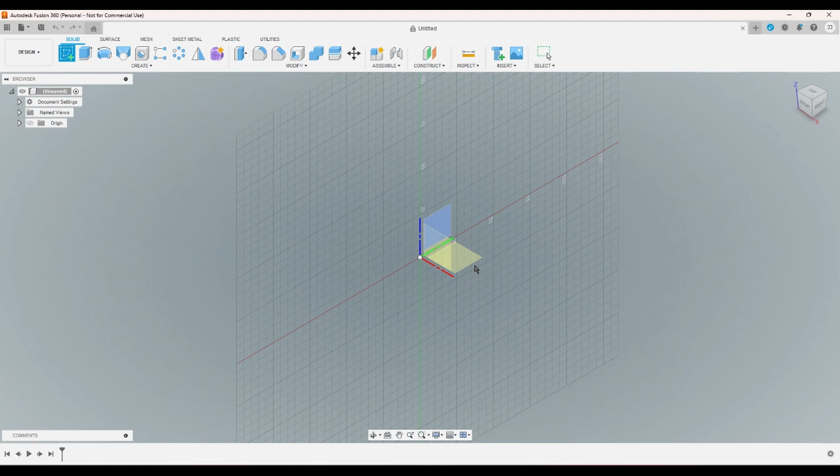So I'm going to make some cookie cutters. I have an idea that I can't believe I've never seen at a store anywhere. The idea is really simple: I'm going to make this circle here, and then put a shape in it. Then this shape is going to be the cookie cutter, this inside shape, and it's going to be connected to that circle. It's going to be like this.

The idea is this: I'm going to extrude this. So this would be the cookie cutter.

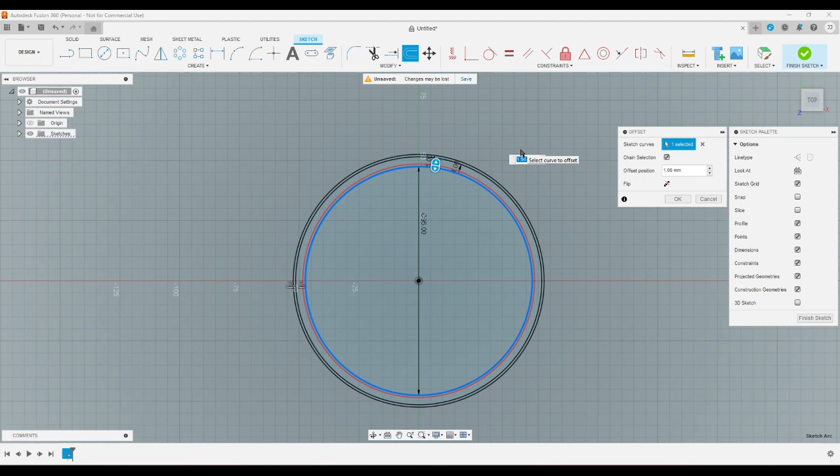Now I'm going to offset this by about 4, and that's going to be the size of the base that all the cookie cutters are going to go on. I'm going to offset this by 5 — that's the size of the sleeve. And then I'm going to offset it again by about 9, and that's going to be the thickness of the sleeve.

Now if I'm going to make a Christmas cookie cutter, I'll make a snowman, because I clicked on circle.

Right, so I'm going to connect all of these centers, make them collinear, and make it vertical. And I'm just going to eyeball a snowman.

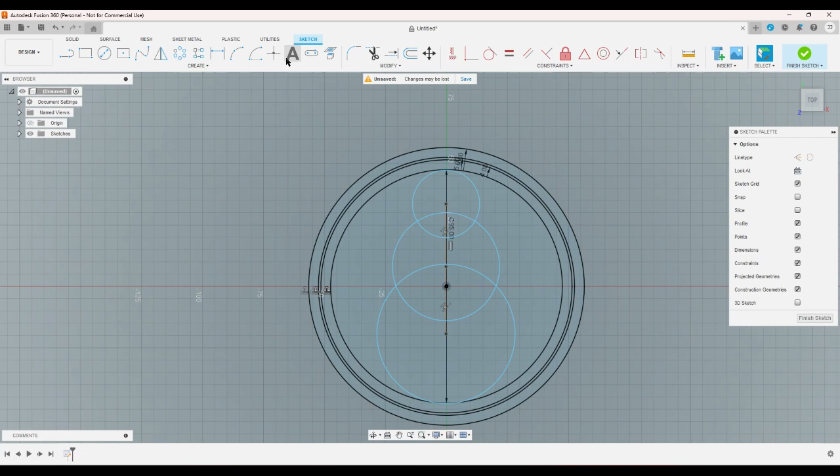All right, now I'm going to trim these. Now I should be able to take an offset. Now the thickness is always going to be 0.8 — that's 2 walls from the printer, and that's going to make it thin enough to cut through cookie dough, but thick enough to not fall apart.

And now this is already technically connected to the base, but I want it to have a more secure connection there, so I'm just going to eyeball this. Might as well put that there. I don't know what that did, but that won't work well — oh, that worked. Okay.

So now if I extrude this stuff, including the snowman shape, and I make it negative 1.2,

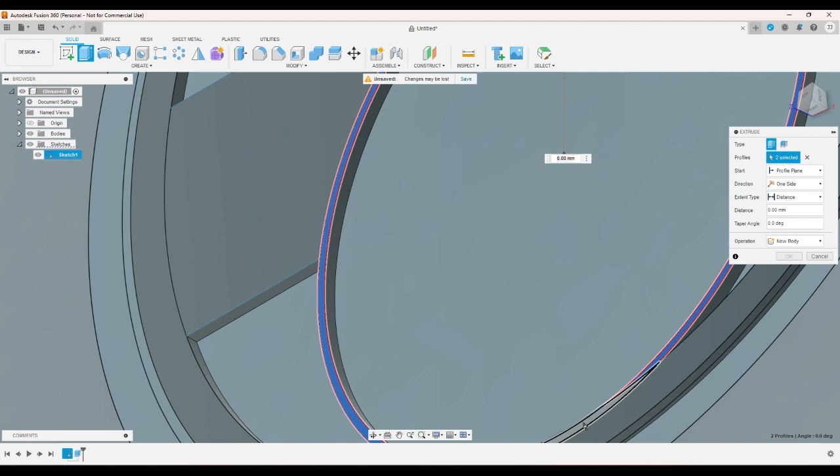and then I bring up the sketches and extrude just the snowman shape, remembering to get the entire shape here, because if I don't, it's going to screw everything up. And I make it — how does 25 sound? That's pretty tall. How about 15? Okay, I think that's good.

So what I think I'm going to do is instead of making every single one of these with the exact same — let's see — I'm not sure exactly what I'm going to do yet.

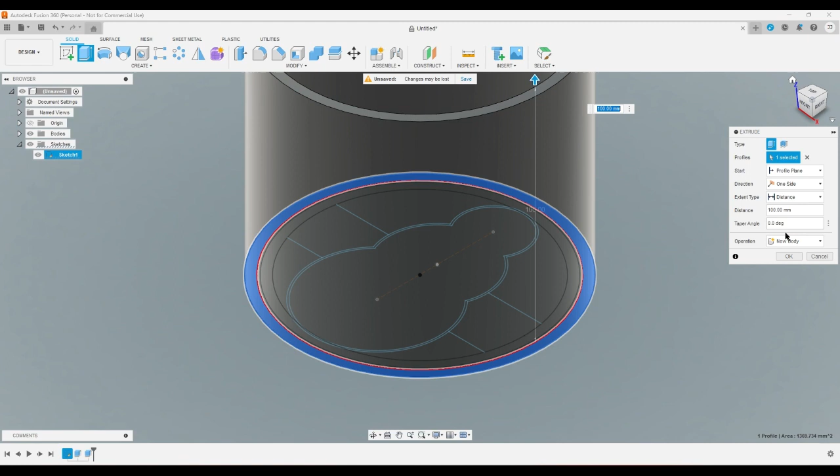Now, in order to print the sleeve, I don't want to print it standing up like this. I just don't like that, because if I have a lot of cookie cutters and end up needing a tall sleeve, that's going to be on the weak side. But that's not really an issue. The biggest reason I don't want to print the sleeve in this orientation is because I want to put holes and slots in the sleeve.

So sketch 1 is me getting a bunch of ideas. I'm going to call this base, sleeve, and snowman.

So I'm going to go back into the sketch here. I'm going to put a line coming out here, a center point, a line coming through the center here, and then mirror that line.

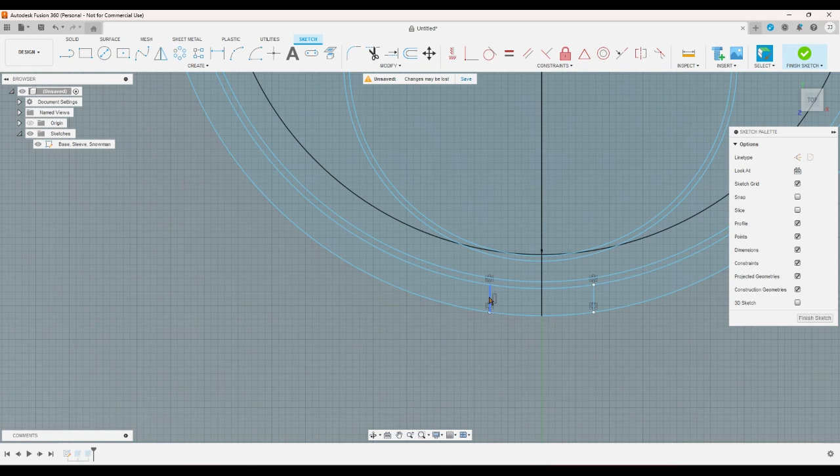Okay, why can't I move the line? Horizontal, vertical, delete coincident — why is that? Delete coincident there. I don't know what happened there. Okay, delete coincident here. Now mirror the line. Okay, now I can judge. Okay.

Okay, in order to do what I want to do, I really think that this should actually be greater than 9. I think having a thickness of 5 here will really help me.

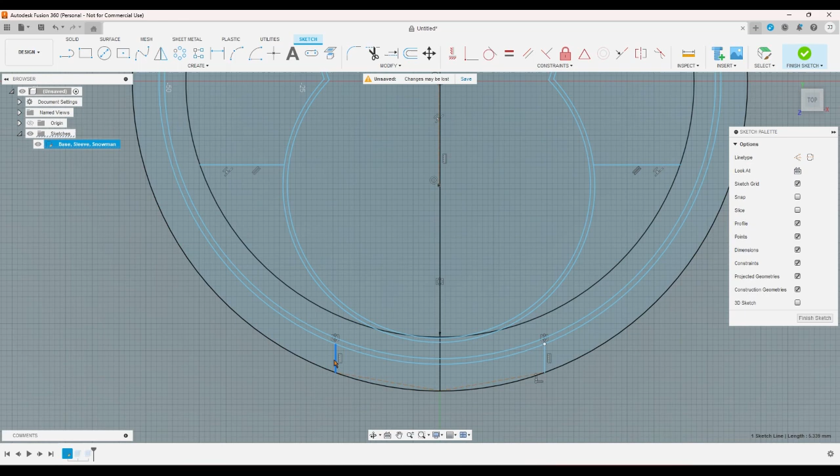Okay, cool. So now I'm just gonna measure these. Make them 45.

Okay, pattern these. Select this. 4. Alright, so now I can go from here to here and do the same thing. You know what? I might just do this.

Oh, cool. Cool. So now this is what the sleeve is going to look like.

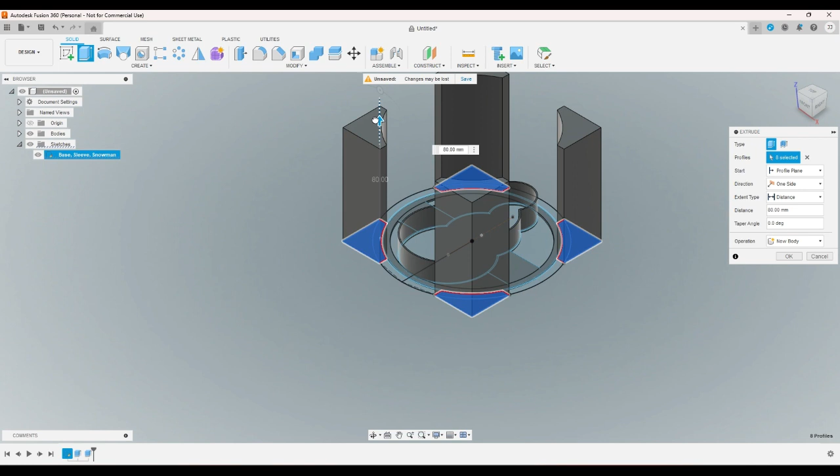I'm going to make it if this is 1.2 plus the 15, that's 16.2 times, let's make it 10. That is enough space for 10 cookie cutters, apparently.

And now I should have a total of 5 bodies, right? Body 1 is the cookie cutter, 2 through 5 are the sleeves.

Now what I'm going to do is make... Okay, hang on. Now what I'm going to do is make a sketch on this plane here. And I'm going to get rid of the cookie cutter, and I'm going to project all the sleeves, all the sleeve pieces. I'm going to make a base for them so that they can stand on something.

I'd like for them to fit in pretty snugly. How about... yeah, 0.15 should do it.

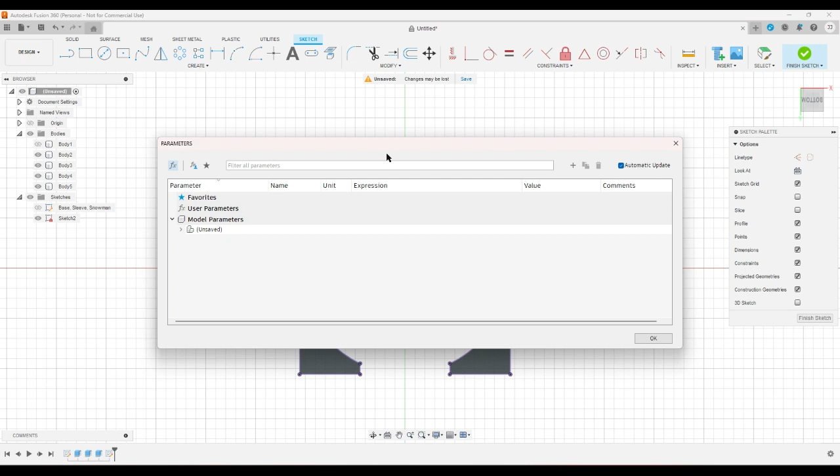Actually, I want to see something. I've never done this before. How do I do this? User per... can I double click on this?

Ah, okay. If I make this tolerance 0.15.

Gap for snug fit, I will call it. And if I'm going to do that, I'm going to call that T-snug.

Okay, okay. Now what if I change this to T-snug? Cool. Cool, cool.

So what that'll do now is if I go into the parameters, let's see, how do I edit them? Filter the list of parameters. Okay.

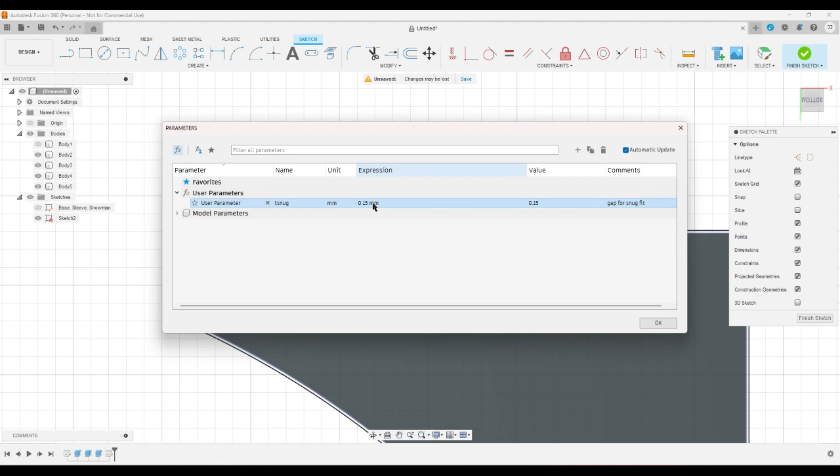So I'm going to change that back to what I wanted. Okay, and then I'm going to do the same thing here, on the outside, on the outside.

Okay, T-snug. That's cool. That's cool. And while I'm at it, let me add another one.

Can it be T-snug plus 2? And I'm going to call that, let's see, outside. No, I'm going to call that wrapper? I don't know, what should I call it?

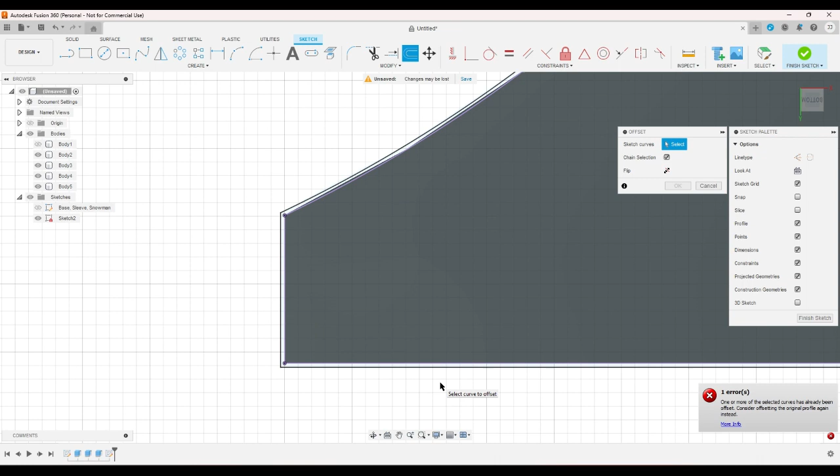Like the reason I call it wrapper is because like it wraps around another piece, right? Okay, so now I'm gonna put a circle here. Can I constrain this to this?

I can. Okay, so now if I change the parameter for this to like 5, right?

This has come in with it. I'm going to actually make it 1.6. I do like 1.6. Okay.

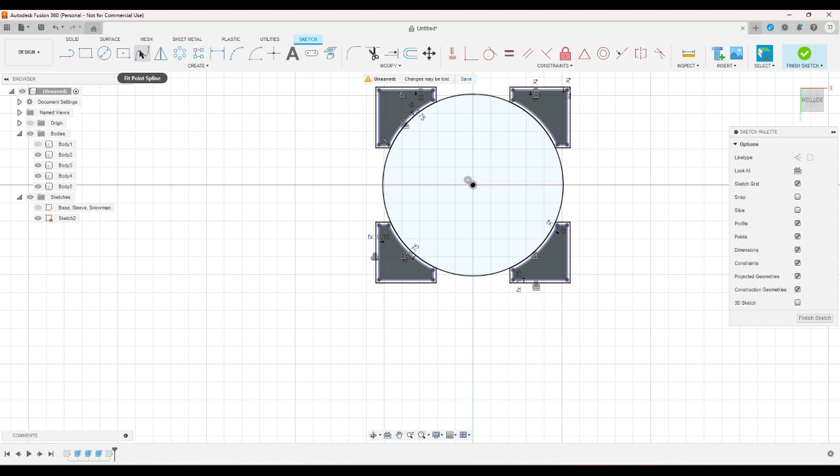Okay, now I'm going to make, let's see. So what I'm making here will be essentially a bottom piece for all the pieces of the sleeve to go into. And so this bottom here is just going to keep the

it's just going to keep the cookie cutters from falling out of the sleeve, right? It's the bottom. It's a floor.

You know what? I really like these parameters. I'm going to add another one. I'm going to make it wall thickness and make it 1.6.

And in fact, I'm going to change wrapper to T-snug plus wall thickness. Can I do parameter expression edit failed, invalid string? Okay. Okay.

So now if I extrude this, negative wall thickness, that's cool. So I'm gonna go back in the first sketch and do something.

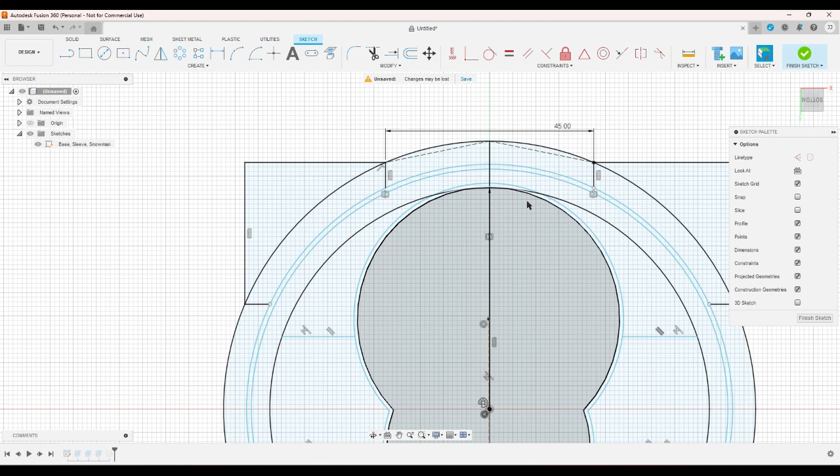Never mind. I don't know what I did in the first sketch. Okay. So now I should be able to get all these pieces together, extruded as one piece.

Include that, and get that. And bring that down by... I could probably make this wall thickness too. Yes, I can. That's cool.

I need to include with this all of the other bits.

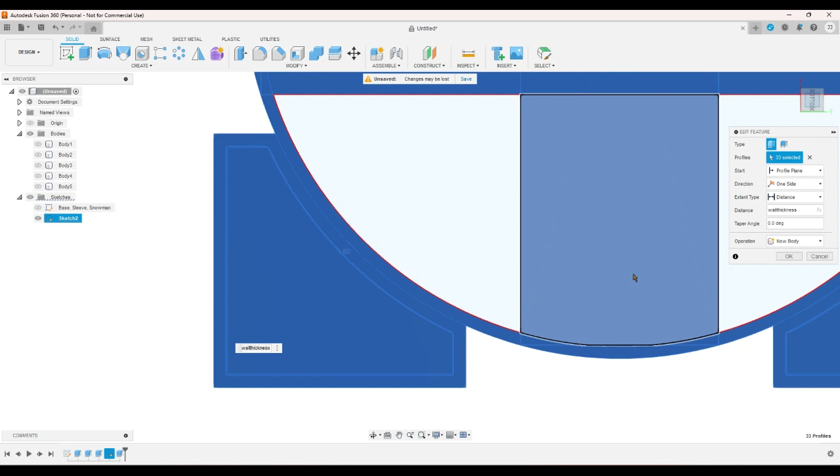All right, bring the sketch back, extrude up these, and I don't know, like 20 seems good.

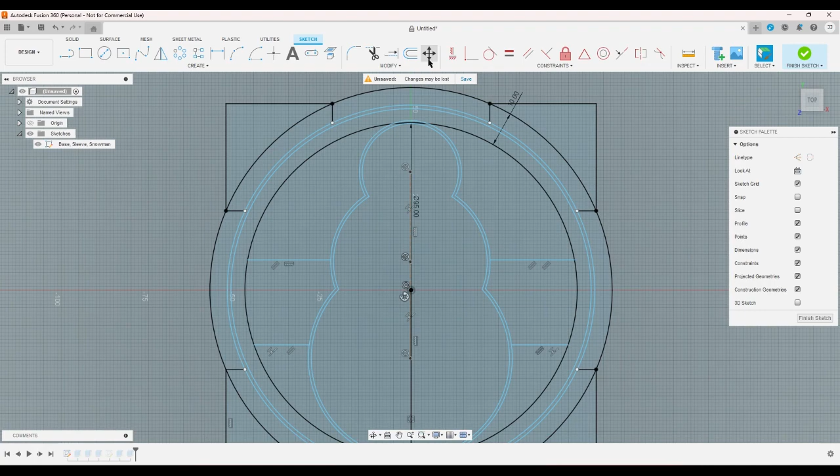Oh. Good thing I did that, because now this is inside this. Which means that the base here has to be smaller. Has to be...

If I put a circle here, no, if I put a circle, let's see, from here to here, this would be wall thickness plus, hang on, first I'm gonna put a measurement here.

Okay. From here to here is 10. Let's see. From here to here, now here to here, is 5. And this is going to be the wall thickness, right?

Plus T snug. Oh, not equals. Plus. Alright, and now if I measure this, 3 1/4 is pretty good.

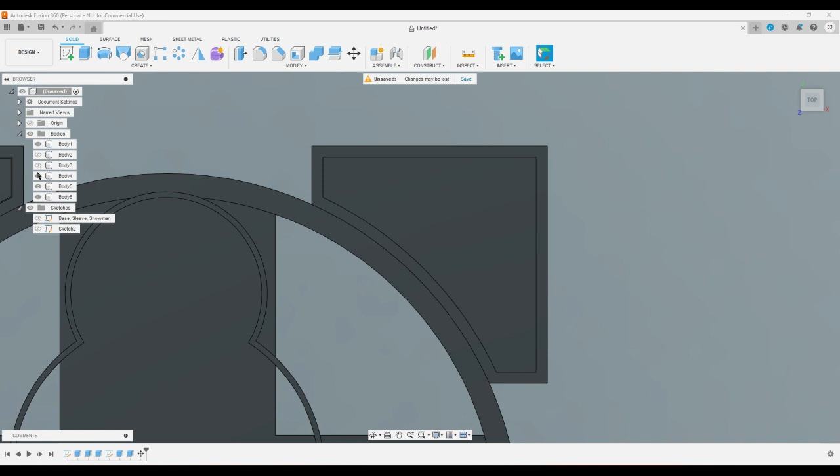So now if I get rid of the cookie cutter, I've got, no, if I do get the cookie cutter and I move it upward, and I get rid of this body, but then I bring it back and look at it in this direction, and I get rid of... I know what I did. Okay.

Plus T snug times 2. There.

Actually, I don't want it to be snug. I'm gonna go ahead and add a new parameter and call it tloose. Make it 0.25.

Go back in here. Now instead of .tsnug times 2, it's .tsnug plus tloose.

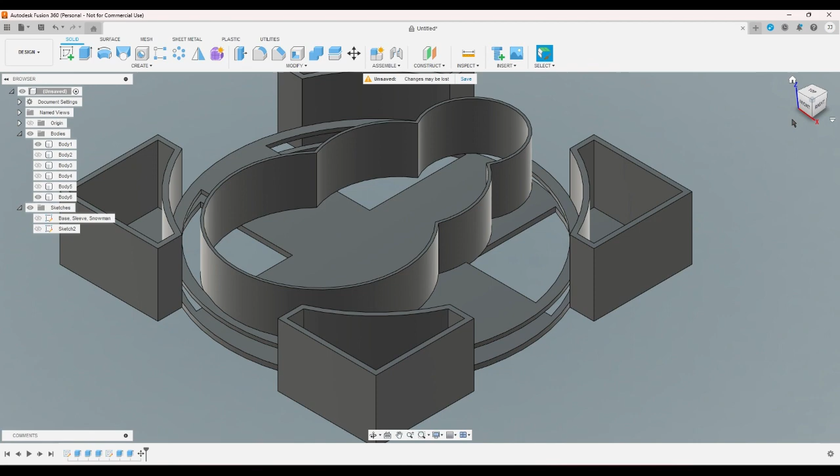So now if I look at it, that should be, so if I start a sketch here and I project this and I measure it, it should say 1/4 millimeter. Okay. That's excellent. That means my math is correct.

Gonna go ahead, delete this move. Gonna go ahead and start a sketch on this plane, and I'm gonna go ahead and project this plane. I'm gonna put a rectangle. That was 1.2, right? Yeah, cool.

So here's what I'm gonna do. I'm gonna make a new parameter. This is a really cool thing that I wish I'd learned about earlier. I'm gonna make it base thickness.

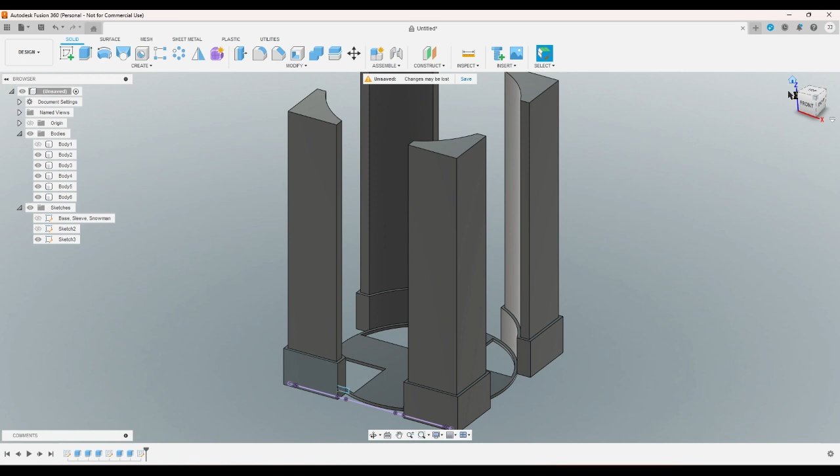Oh, I just realized what I'm gonna do, what I wanted to do is not gonna work. What I wanted to do was to be able to take these cookies out from the sleeve by sliding it like this. By sliding it like this.

But the shape of the cookie cutter is going to get in the way of the sleeve, so I don't think I can actually do that unless I make the base really big and the sleeve walls really small, or the sleeve legs really small. I'll call them legs.

Because ideally, right, every cookie would fit inside of a 95 millimeter circle. That means that in order to actually do that feature, I would need from here to here to be 95 millimeters, and I really don't want to do that.

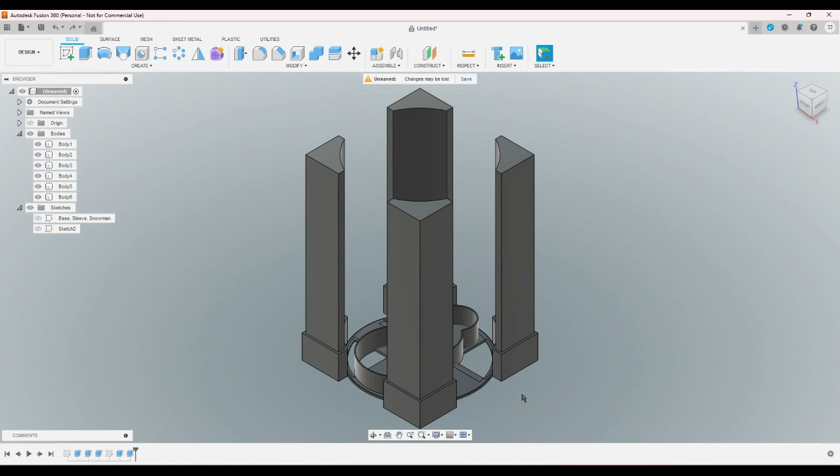So yeah, I'm just going to go ahead and not do that then. That's unfortunate, because I don't want to make it massive, you know. I don't want to make this thing... Well, I mean, it's not like it's going to use extra filament if I do make it big. I mean, it'll use extra filament for the cookie cutters, though. The cookie cutters will use a lot more filament.

So here's what I'll do. This is going to be cookie cutter type 1. Okay. This is going to be nothing. This is going to be base. Base 1.

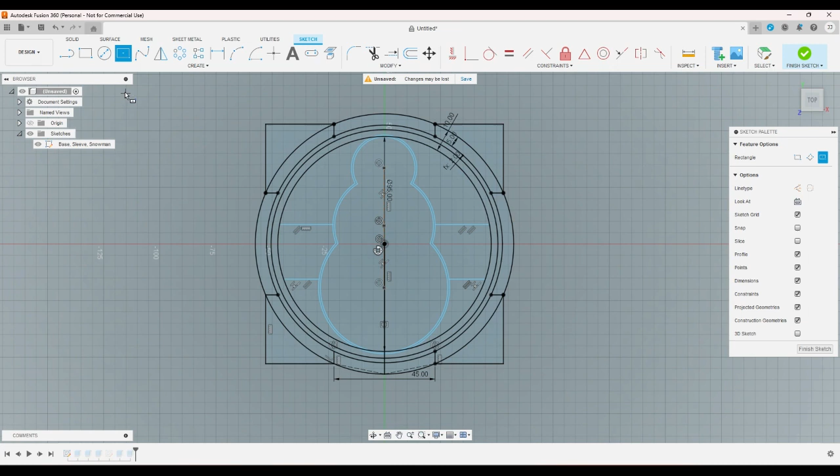If I go back in here, right, and instead of doing this, I did another circle. No, I did this. What if instead I did this?

Right, so then the entire cookie cutter will be in this like square slot instead of a round slot. And I can still make it pretty small actually if I... okay. I'm getting too confused with this.

So now here's what I'm going to do. I'm going to get rid of all of these bodies. Make a new sketch on the origin. Make a new parameter. Call it cookie size. Call it cookie. And make it 95.

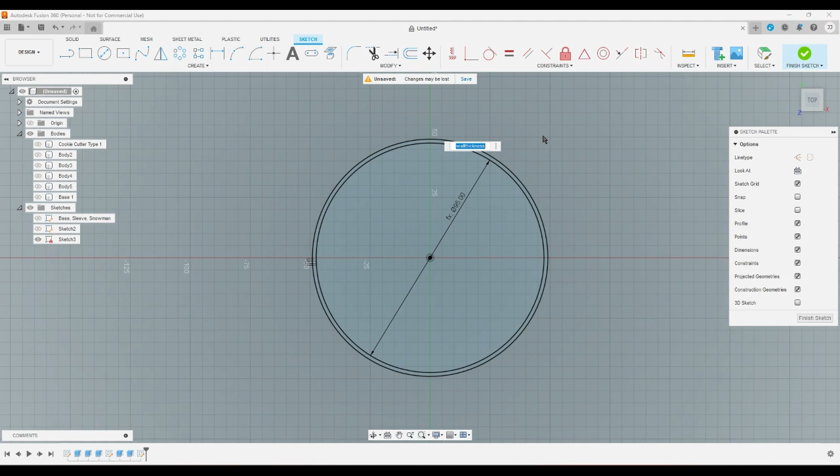I've decided I want to get into the habit of using parameters. Okay, cookie. Offset wall thickness. Wall thickness times 2. I think that makes sense to me.

Now if I make a bunch of boxes, and make them wall thickness times 1.5. Ooh, I like that. No, keep that as 2.

I make another box. This one will be a construction. This one will all be construction. And they will all be touching this.

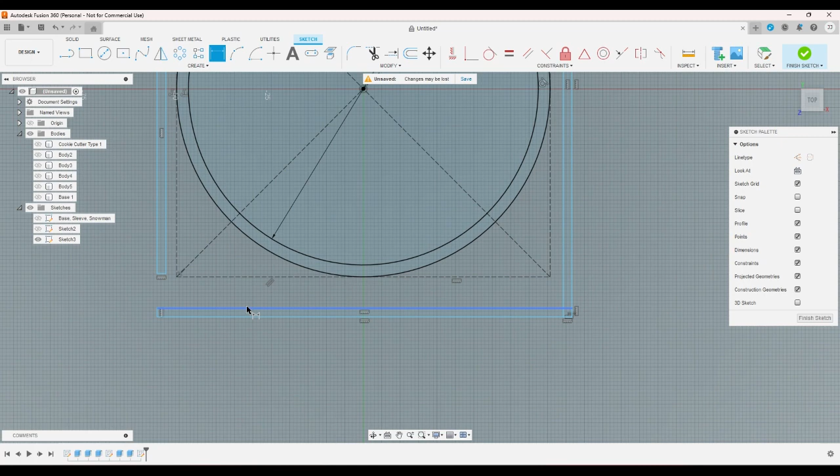Make this one equal to this one. Now, the distance from here to here is T loose. And this is T loose. Right? T for tolerance, loose for loose.

And then this is going to go into here. I'm going to go ahead and slap this onto here. So this will be the sleeve that it goes into, and it will be interesting.

Because now what I can do is I can put the base. No, that's right, that's right. Okay, so now what I was going to do, because I was going to put the... so I actually want this to be very big.

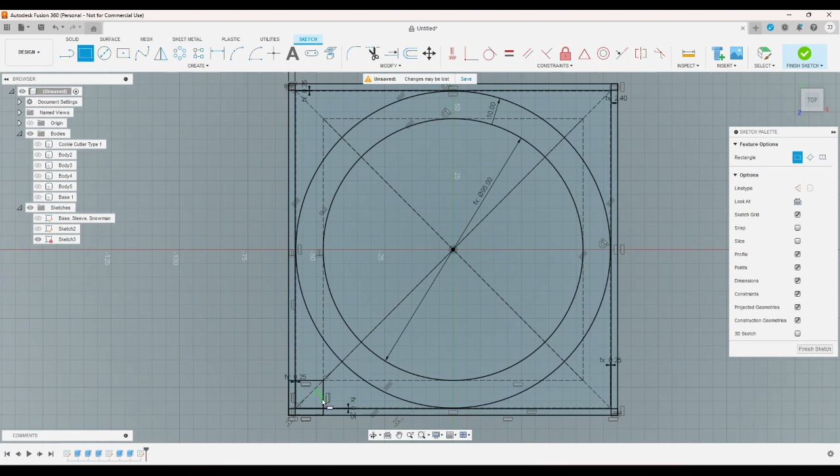So now what I'm going to do is I'm going to put a rectangle from here to here, a rectangle that is not a construction from here to here, from here to here, from here to here, and from here to here. I'm going to offset from all of these rectangles to loosen on the inside.

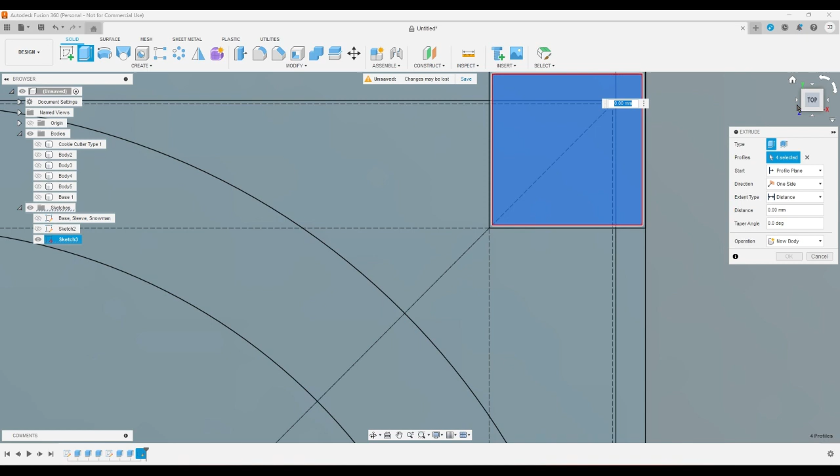Okay. So now I'm going to go ahead and make this right here is going to be each sleeve. And I'm going to have to make them all, even though I don't need them all, because I need to be able to visualize this whole system.

If I use 1.2 plus 15 times 10, okay, 1.2 plus 15 times 10 plus like 0.15 times 9.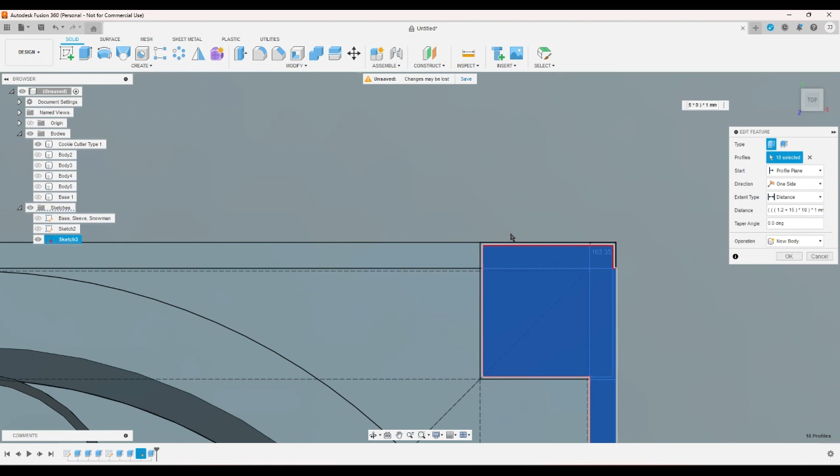This needs to be one body. Does it need to be one body? It doesn't really need to be one body. But for the purposes of this, I'm going to make it one body so this makes sense to me in my head real quick.

Okay. So get rid of this, bring back this sketch, extrude this, like 1.2. Right, and then...

That is how the... so this empty space here is the space available to me for me to cut out a cookie.

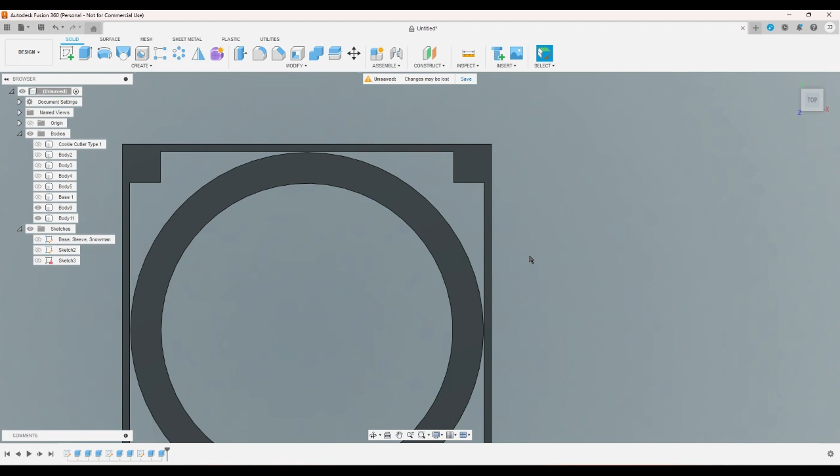And then what I can do is, okay, now to visualize this better. Wait. So now if I make a sketch here...

I'm going to put a line at the center point here going down. Find the center point of this. Put that there. Put this there and make that vertical. Just cookie. Okay.

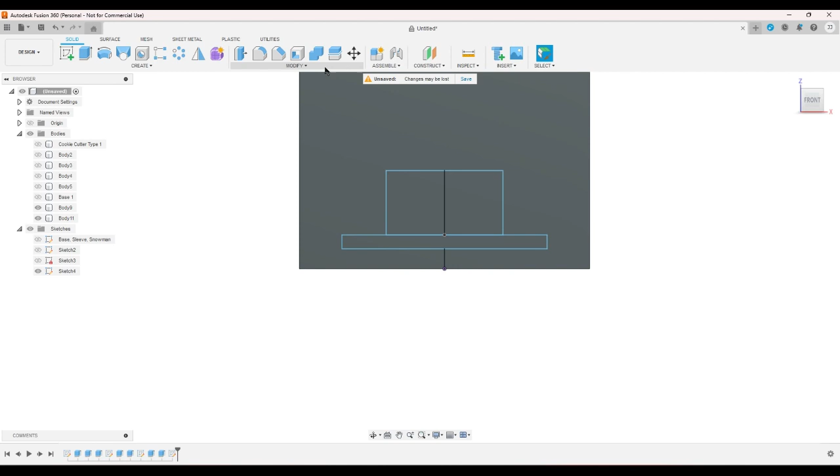So now what I'm going to do is I'm going to make a parameter. I'm going to call it the cutter base. It's going to be 1.2. This is going to change to cutter base.

So now in this sketch, this is going to be cutter base plus T loose times 2. What is T loose? Okay, oh yeah, that makes sense. Yeah.

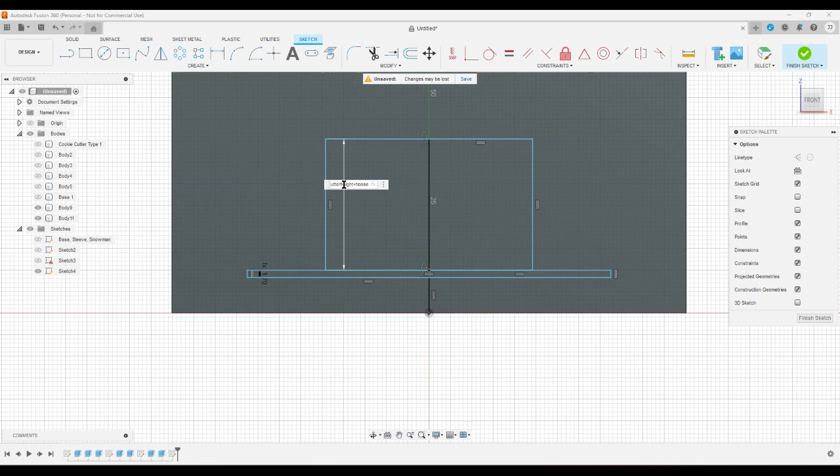And then this, I'm going to make a parameter, call it cutter height, and that's going to be about 15. So now this can be cutter height plus T loose. I think just one should do it.

And now what I should be able to do is, I should be able to project this, okay. That one's not perpendicular. Okay.

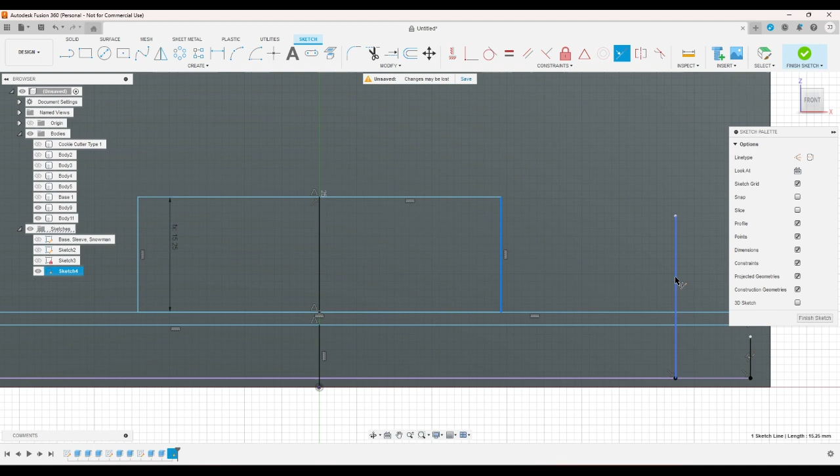So now I should be able to make these go to here. And just move this up and down. Then cut it all out. All.

So now what should be the case is if I mirror this, or not mirror, if I pattern this, here's the idea, right? I pattern this feature on this, and I use a spacing and a distance of cutter base plus cutter height plus that 0.15.

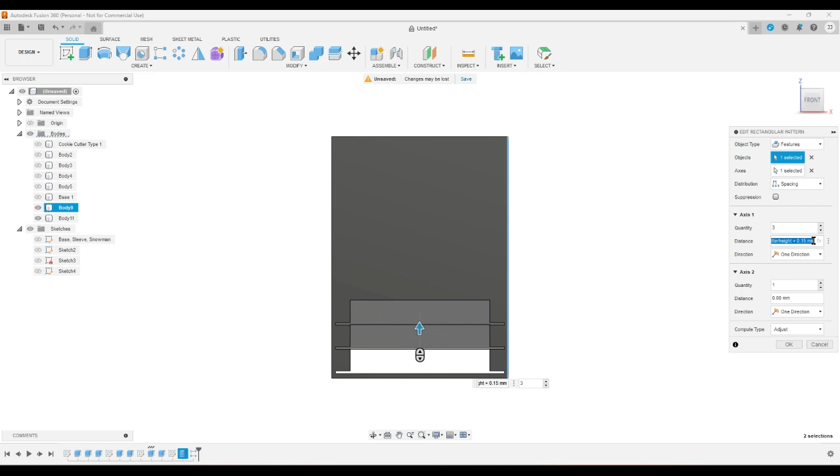Right? Then what I should be able to do is if I take this sketch here and I just, no, okay, if I take sketch 3 and I extrude this up by cutter base plus cutter height, so what should happen is I should be able to move this up a little bit by like...

I should be able to move this like that, right? And then I should also be able to move this out. That's the idea. Is that I should be able to slide these out and grab whichever one I want.

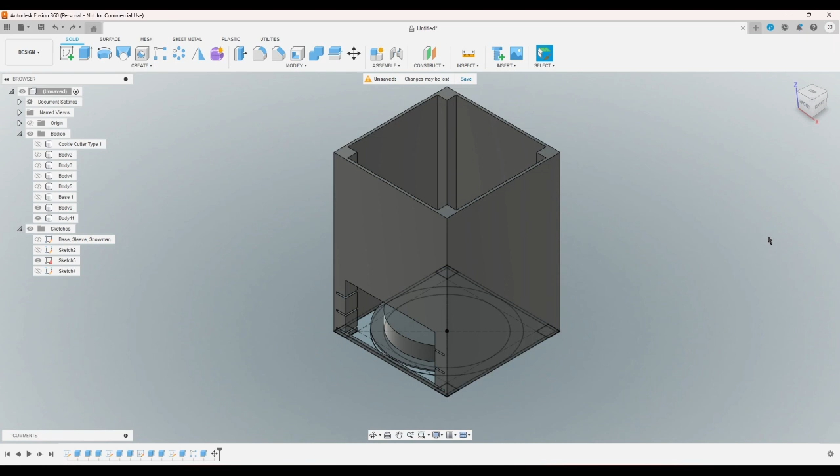But I'm going to go ahead and Control Z from all of this, because this was just essentially a proof of concept idea. Because this can go about as far as here.

Okay, now I'm in the sketch. Okay. So now what I'm going to do is I'm going to rename this to cookie cutter base.

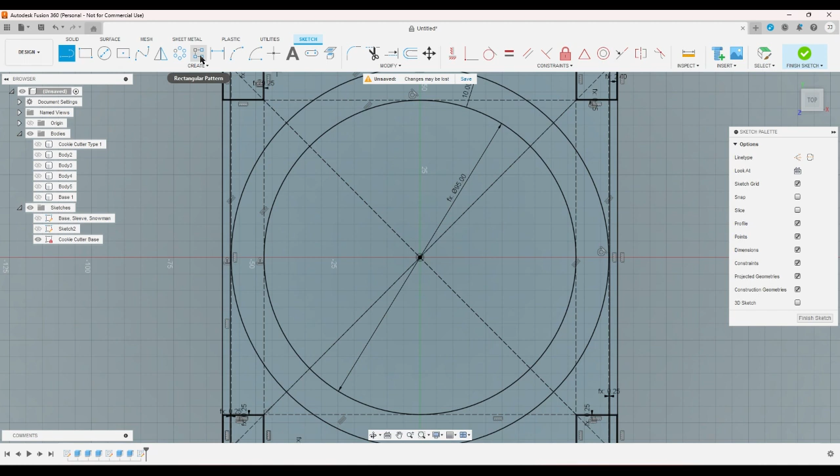And I'm going to change it again, because what I'm going to do is I'm going to add a simple little... can I offset this? Yeah.

Pattern this around here 4 times. That's cool. Okay, so now I'm going to go ahead... oh okay, that Control Z got rid of the parameters, didn't it?

T-slot, yeah okay. So add cutter base, 1.2 millimeters. Add cutter height of 15 millimeters. Okay, so now grab all this and make it cutter base.

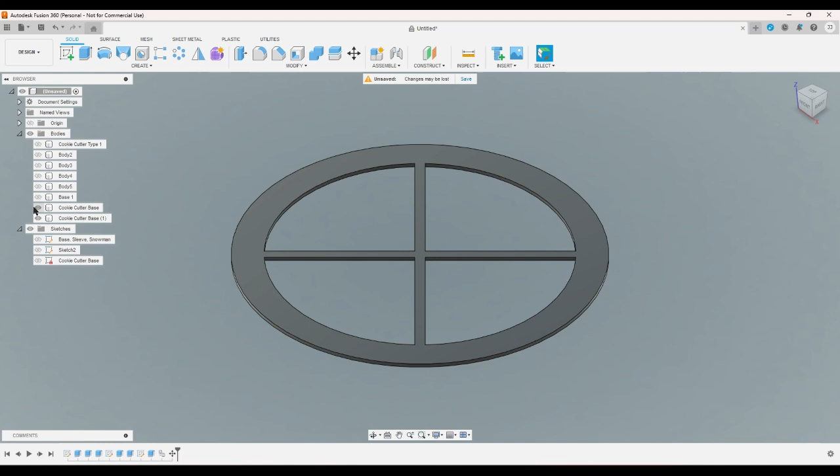So now what I can do is make a sketch here, but not here. I'm gonna rename this to cookie cutter base. And then if I can move it and make a copy, I can get rid of the base, make a sketch on the copy, and say I want a snowman, which is what I did before, so I'm going to do that again. And I'm going to give him a top hat this time.

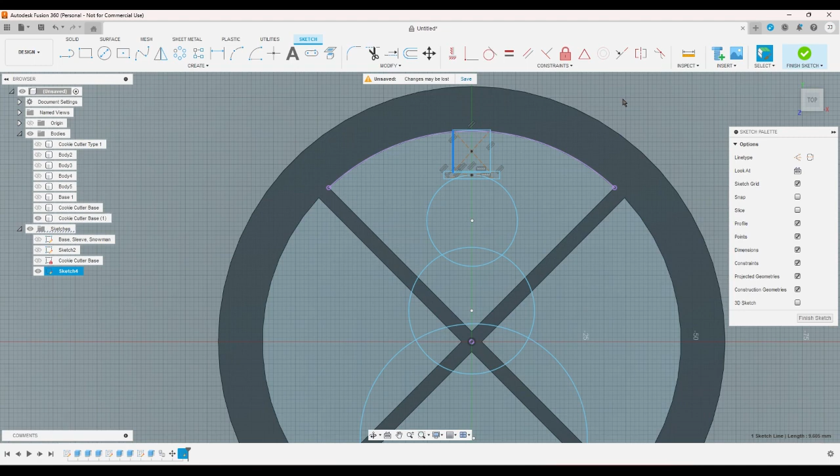I'm going to trim it all up. I'm doing the wrong thing. Yes, yes, I know.

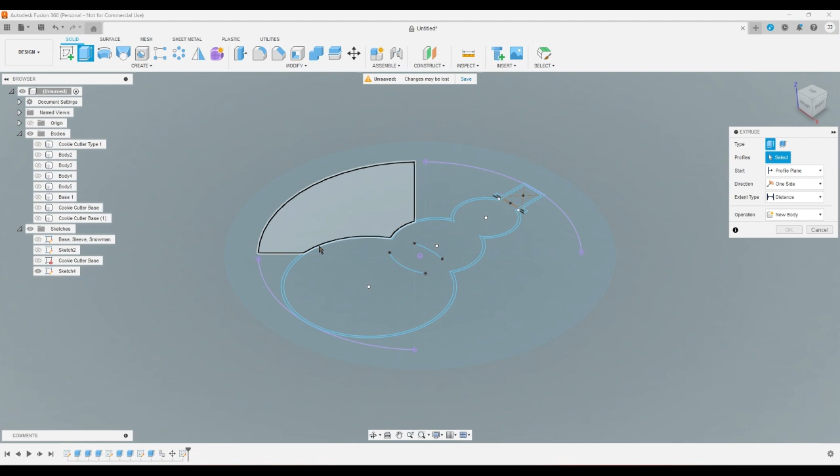So now I can extrude this whole thing. And make that cutter height. Whatever, I can extrude this whole thing. Oh wow, the geometry of the face it's on is still there. That's kind of annoying, actually.

No, not cookie, cutter height. Bring back this. And now I have a snowman cookie cutter. And that's pretty cool.

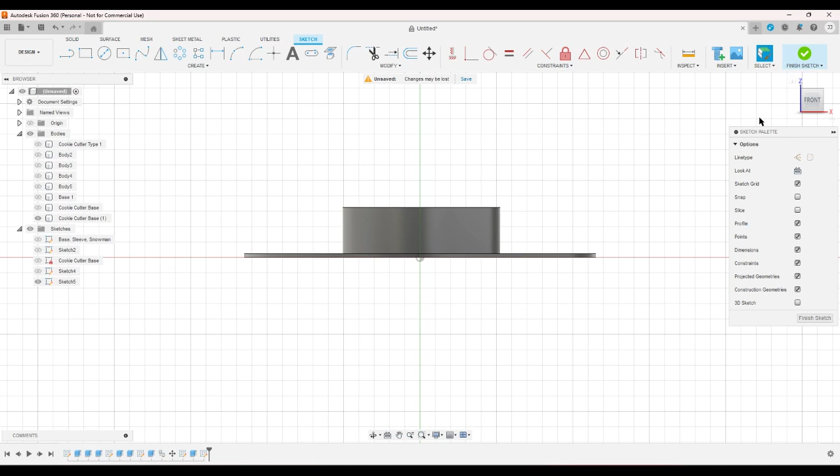So now I'm going to disregard this. I'm going to make a new sketch on the back here. Which... something, no, don't save yet. I've been at this for an hour?

Okay, I'm going to start a sketch on the back here. So now what I'm going to do is project this here. I should also, but that's for later. I'm going to offset this by T-loose,

right? And then I'm going to put a square around it. Put that there. Put that there. Okay.

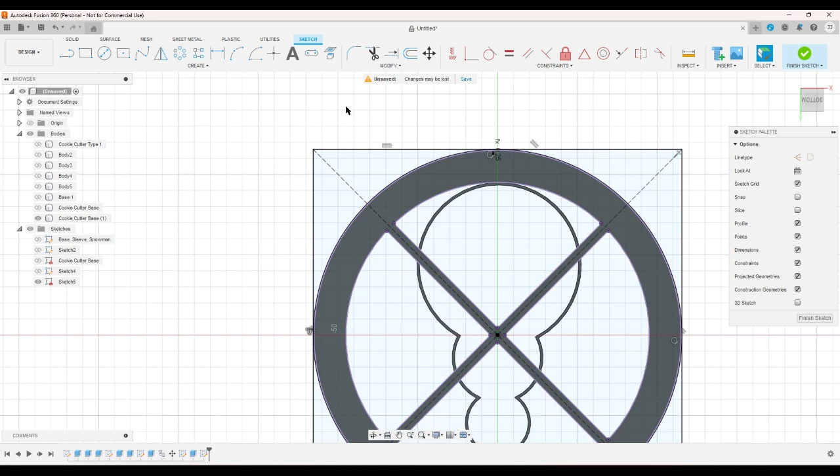And then the legs of this thing can be this, right? Or it's part of, can have this, as long as I have a smaller thing that has this. So then, can I offset? No. So if I put a line, no, another one, I'm gonna put another one here. Gonna offset this by T-loose. No, not T-period.

And offset this one. Okay, make this tangent to here, and this one tangent to this one. So pretty much that much is what each sleeve would have to be.

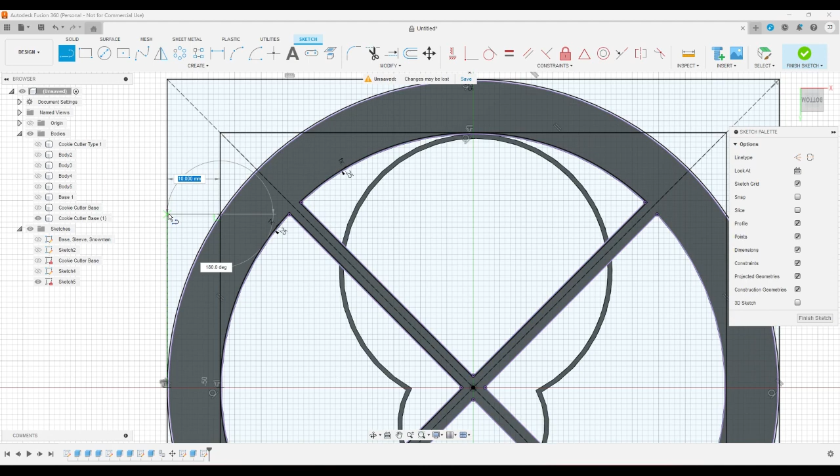Am I conceptualizing this wrong? I don't think I am. No, okay, I am conceptualizing it wrong, but this is what the inside of the sleeve leg would be. Offset from this one of wall thickness. Right? Times like 3.

So then if I put a line here, right, and a line here, right, then what can I do? I can extrude all of this, I believe, and make one leg.

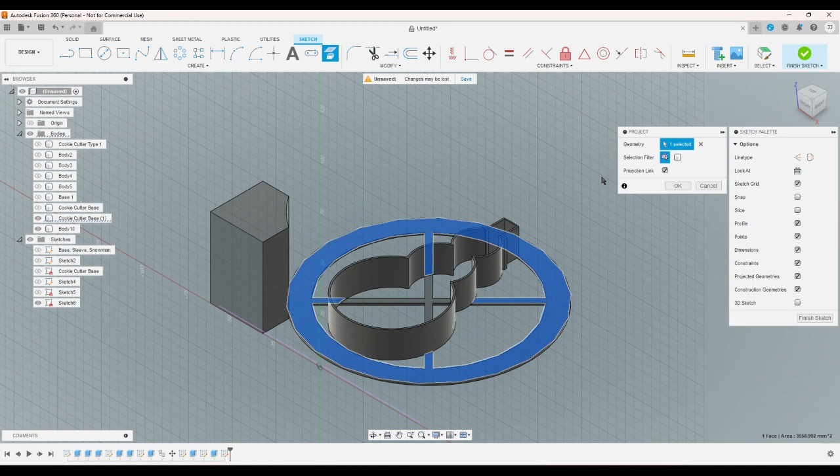Now if I put a sketch on this and I project this, then I can do this.

Cutter base plus T-loose times 2. Cutter height plus T-loose

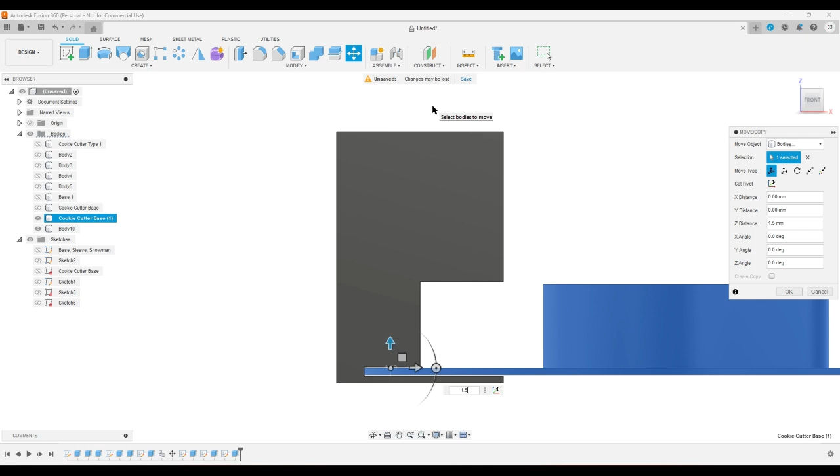and if I extrude this away, if I cut that out, then I move this in this direction by what, like 1.5. Then I move, okay, so this should touch this because of where it is, right?

Yeah, so instead I'm gonna put a rectangle on it. It's gonna be T-loose. And this is gonna be in line with this. And in that extrusion, I'm going to include the new rectangle I put on there. Okay, cool.

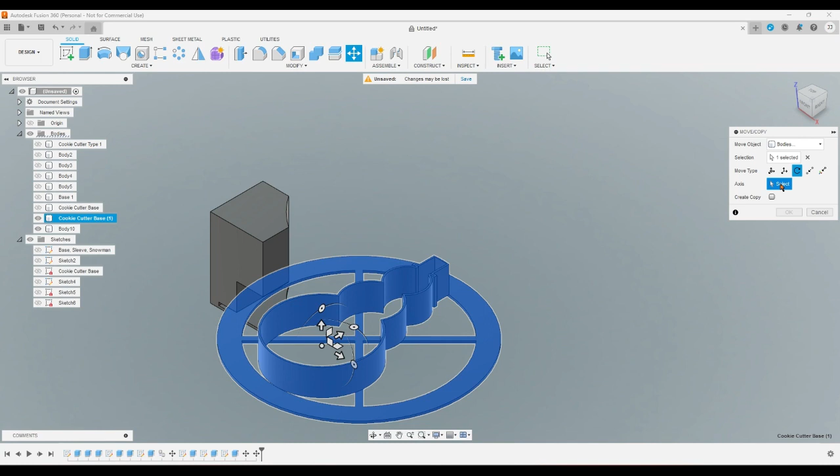So now if I move this like about here, and then I move it again, and I rotate it about 90. And put another rectangle here, which is also... okay, that'll work.

And then, whoops, if I delete these movements, and then I take this extrusion and make it two-sided. Ooh, should I make it? I should. And the second side goes down a bit. Call that 5. Okay, good, good, good.

So now what I can do is, this was on the origin, right? Yes, it was. So if I find the plane, this plane here, I can mirror this body. Oh, cool, it selected that plane.

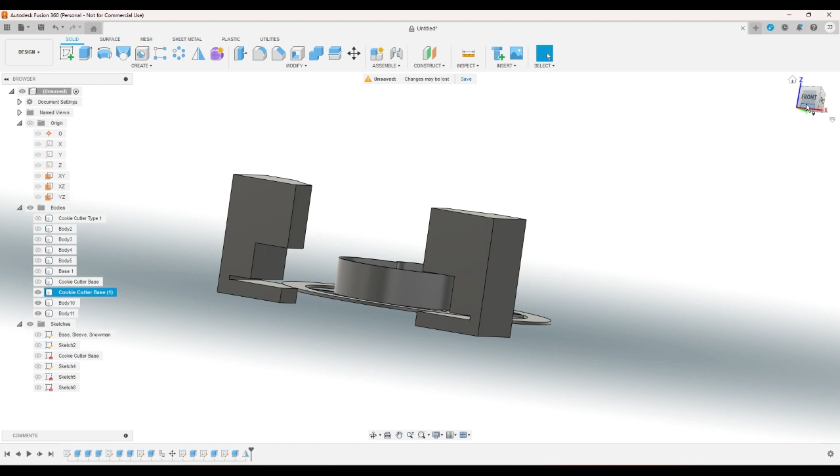So now I should be able to get this out if I want, without it being... so what is the distance between these? 16.95. Okay.

I just had another idea. I'm not going to do it right now, but I just had another idea. Instead of making one long sleeve, what if I made a bunch of short sleeves and made them modular so that they stacked on top of each other?

Also, I just realized if I did this snowman, the top hat wouldn't come out properly. It would just be a rectangle and not have this. But this isn't an actual design for an actual cookie cutter.

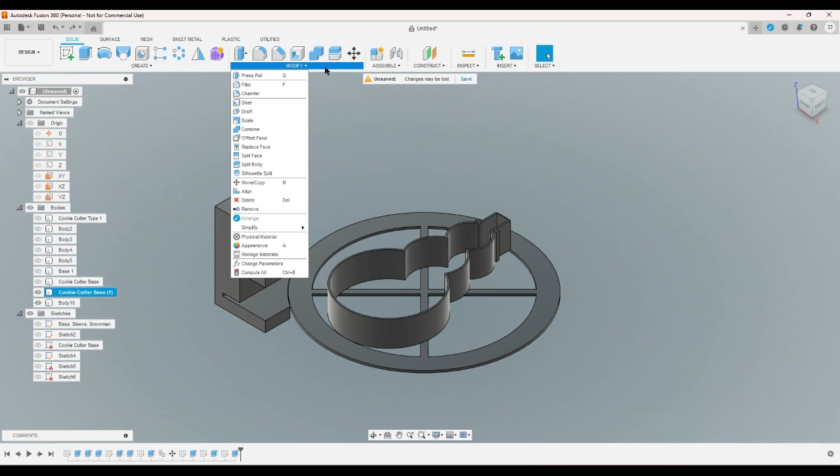So I'm about to make a parameter. Its expression is actually going to be cutter base plus cutter height plus too loose times 3. And its name is going to be sleeve cutout height.

Value 16.95. Okay. So now if I made this extrusion taller, like say that tall, and then I decided I wanted to pattern this, I would do a spacing of sleeve cutout height plus some distance between them, like 2.

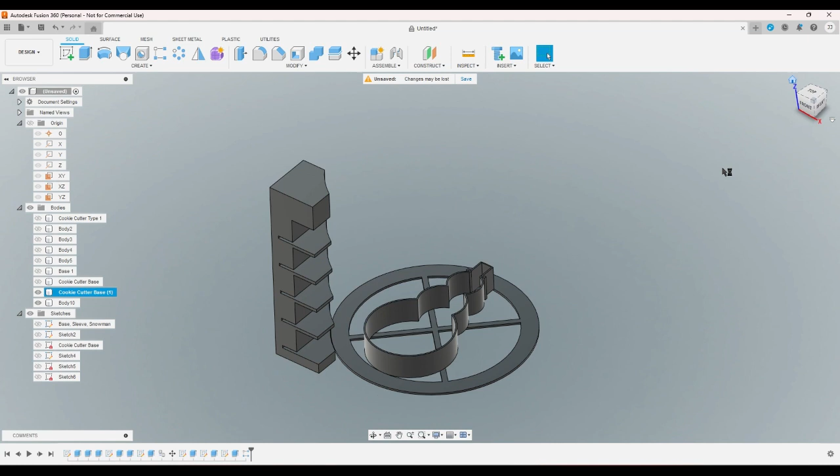And I can make it like 5, and then I could pull out 5 cookie cutters. So the reason I was thinking of modular is if this is going to be the way the stack of the sleeves ends up looking, I might as well just do this much here and ignore all the rest of it, and then just stack a bunch of these together. I think that's probably pretty smart.

And if I'm going to do that, then what I really should do... trying to think, how would I grab each cookie cutter? Oh, I know how to do it.

Okay, so I am going to do the modular sleeve. I think I'm going to do it right now, because I thought of an easy way to do it. Start a sketch here. I shouldn't put that there, actually. I should put the sketch on this plane, because if I delete this body, I'm gonna...

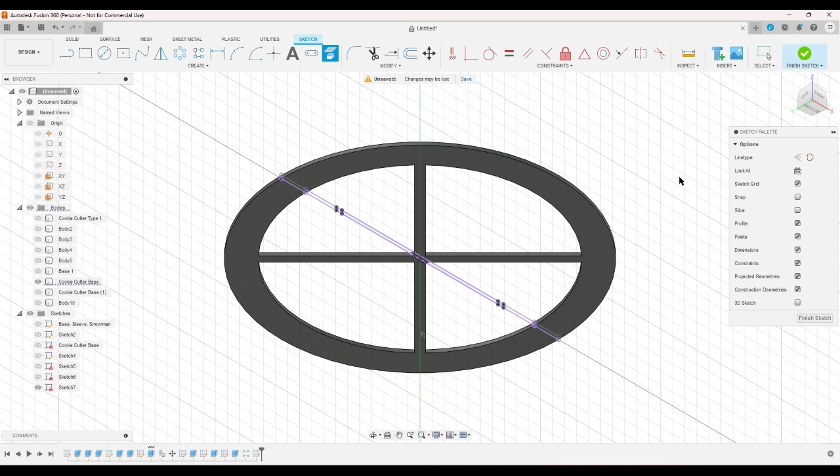Okay, so now this is going to be too loose. This is going to be too loose. This is going to be too loose. Move that there. That's going to be too loose. This is going to be cutter height plus too loose.

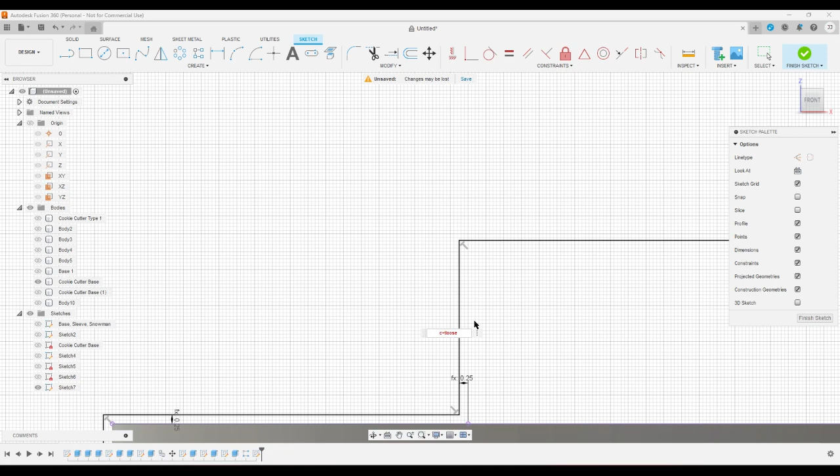All right. Gonna mirror this, with this line.

Okay. Now can I offset this whole thing? It's going to be wall thickness. Wall thickness. Okay.

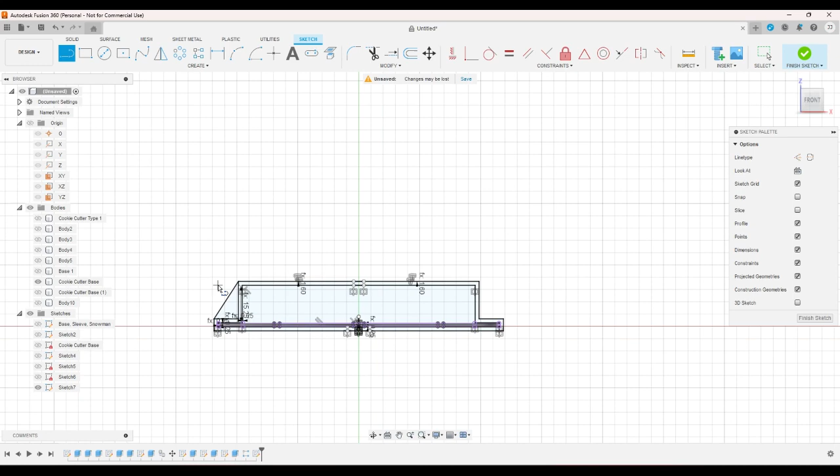And then all I have to do, whoops, hang on. Gonna go ahead and add a... yeah. Then what I have to do is extrude that symmetric, just bring it past the cookie cutter.

Right. So now what I have is essentially a slot that I can put a cookie cutter in.

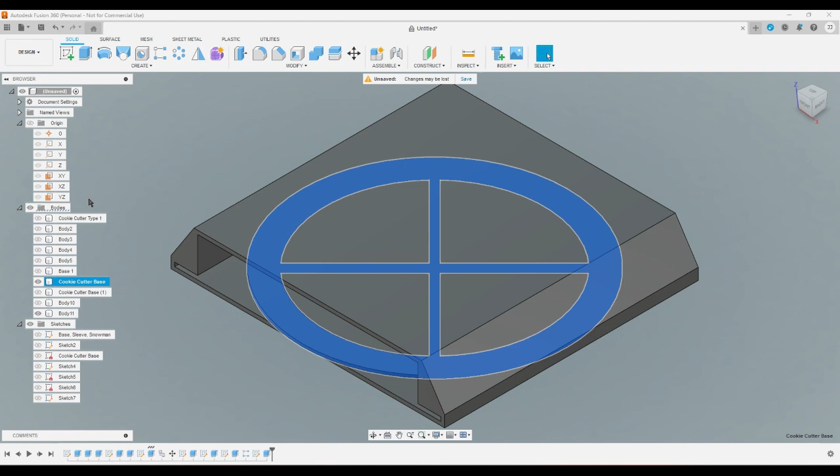So I'm going to take the cookie cutter base, going to get rid of this one. Yes, because I shouldn't need it. I don't need that. I don't need that. I don't need that. Shouldn't need that. Don't need that. Okay, so now I have everything I need still.

So now what I'm going to do is I need to come up with some way of stacking these so that they'll stay together, so that I can make this a modular system so that every time I need a cookie cutter, I make the cookie cutter and the sleeve and I just add on to the sleeve, because I don't know how many cookie cutters I'm gonna make forever, right? So by making this modular sleeve system, I can have all the cookie cutters I want and exactly as many slots as I need. So now, instead of being a sleeve... no, this is a sleeve. Okay.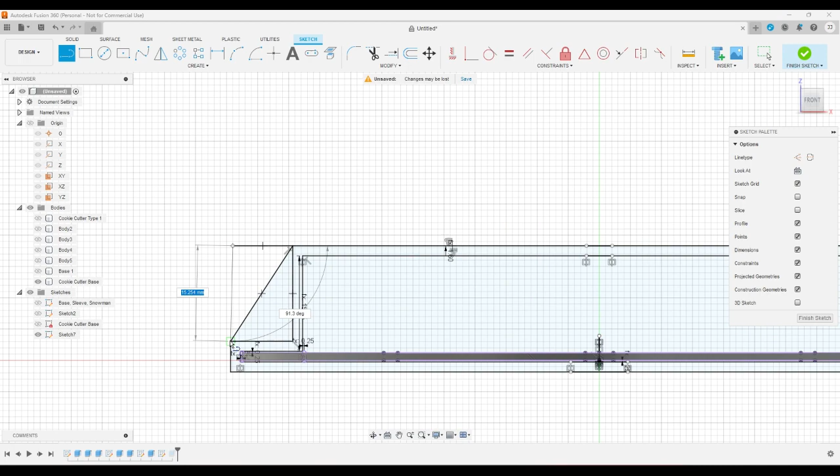So now how do I want to attach this? Actually, I think I have a really simple way of attaching this. Take this, have this. Okay.

Start a sketch on this plane, and now get rid of the cookie cutter base and project this geometry to it, and the same thing on the other side. What? Why didn't it get projected? Okay.

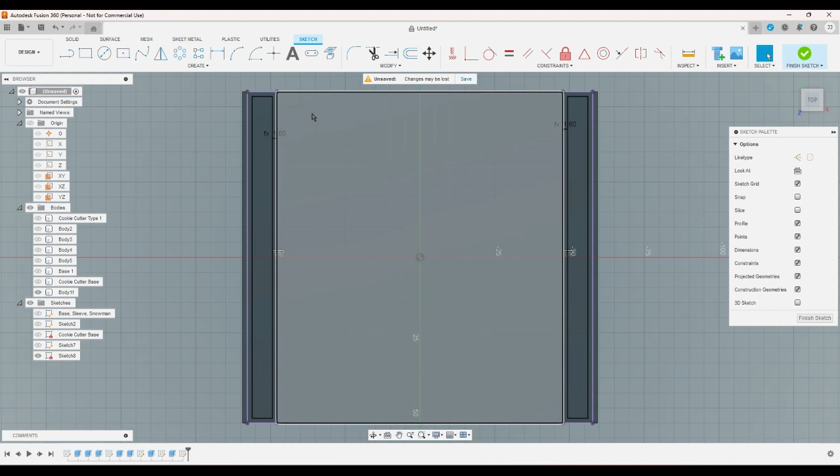So now if I offset this by wall thickness, and this by wall thickness, I can extrude this first to here, then change that to distance, and then subtract. Here's what I'm going to do: I'm going to do this and this, minus wall thickness.

Okay, so now what should happen if I change the wall thickness to something ridiculous? If I change it to like 2, everything got updated. And if I Control Z it, that's really cool.

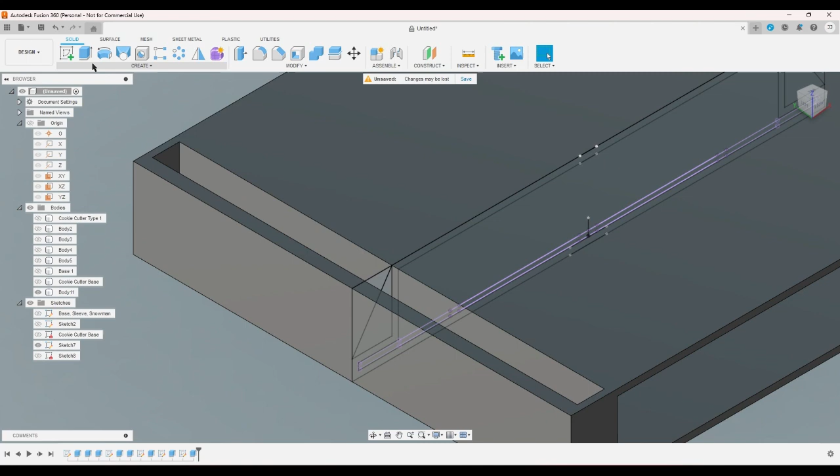I'm gonna bring back this sketch. No, the other sketch, this one. And put these... okay.

Okay, so now what I should be able to do is I should be able to create a sketch on that same plane again, and I should be able to take this and project it. I really only need this. And I also should need this too.

So I should be able to highlight all of this and move it down. Nothing got selected. Okay, so move this. Okay, whatever.

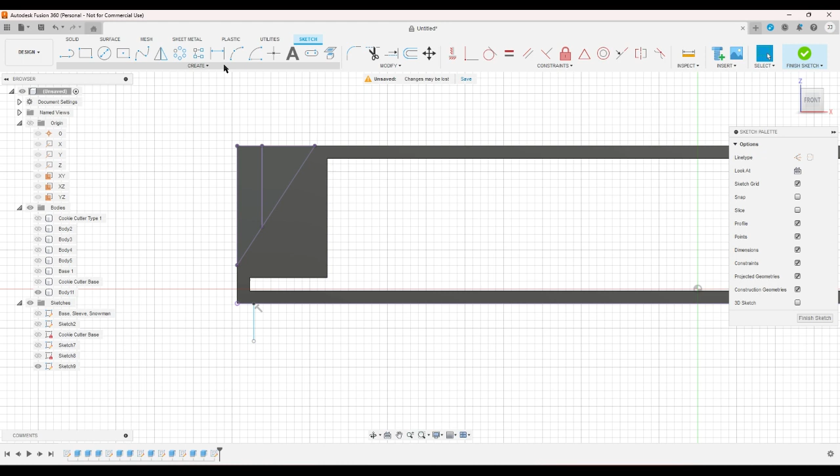Okay, so now what I'm going to do is put a line on this line here that is collinear with this line and equal in length. Now I'm going to put a line here that is parallel to this line and should also be equal in length. Failed to solve.

Now I'm going to go ahead and measure from here to here. 12.401, and this is 12.401. Good. Okay, so now if I offset this, T-snug. All right.

Now I'll do this on the other side. This one's collinear with this one and equal, and this one's parallel with this one. Offset this, minus T-snug.

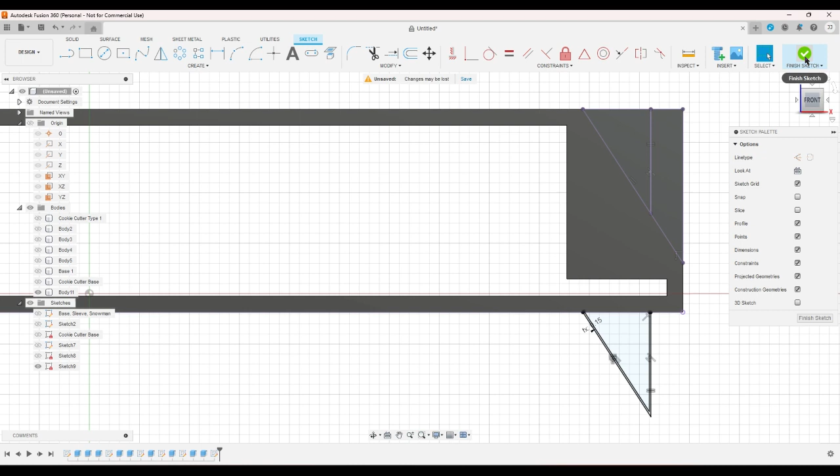So now I should be able to just extrude this symmetric. What was it, 110? Yeah. 110 minus wall thickness times 2, minus T-snug times 2.

So now if I make a sketch here and I project this, that should give me the information I need. And what does it look like? Good. Now, what is the gap here? 0.15. Okay, cool.

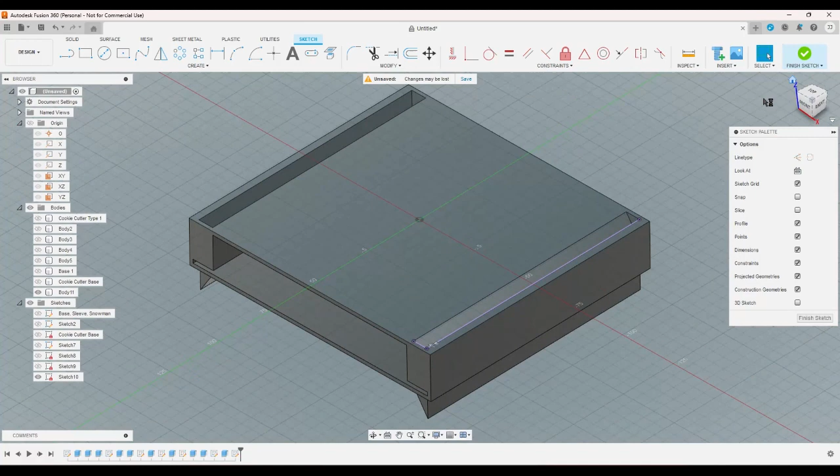Going to go ahead and fillet this because going down to a zero width point is not a good idea. Make that 1.

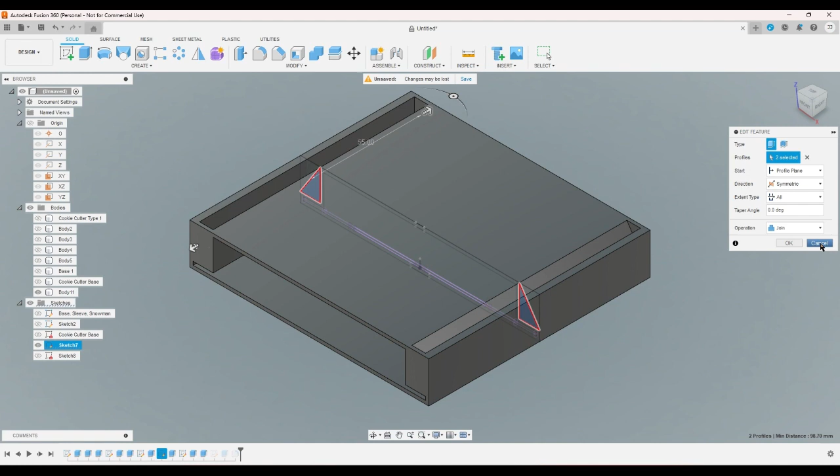Here's what I'm going to do. I'm going to make a parameter - this is the cool thing I'm going to do. I'm going to make a parameter and call it sleeve depth, and make it 110, I believe. I'm going to change this from 110 to sleeve depth. And then this one I'm going to change - no, this one I'm going to change to sleeve depth also. Okay, now what I'm going to do is modify the sleeve depth parameter and see what happens.

If I make that 20... haha! So what I'm going to do is print out 2 of these at this height and see how well this fits into it. And hopefully that'll get the ball rolling on this project.

Okay, what I'm also going to do is take the cookie cutter base sketch here and measure what in the world this number is. 115, got it.

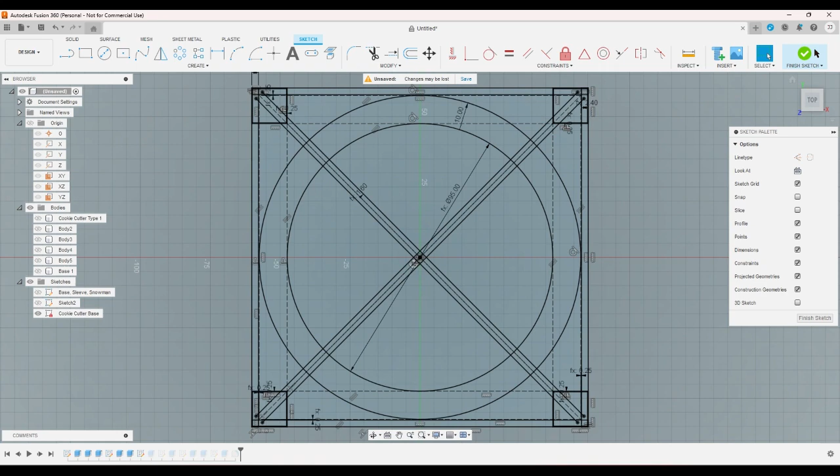Okay, change this sketch to sleeve. Change this sketch to sleeve modularity, and change this sketch to also sleeve modularity. Name that legs, name this one holes. Okay.

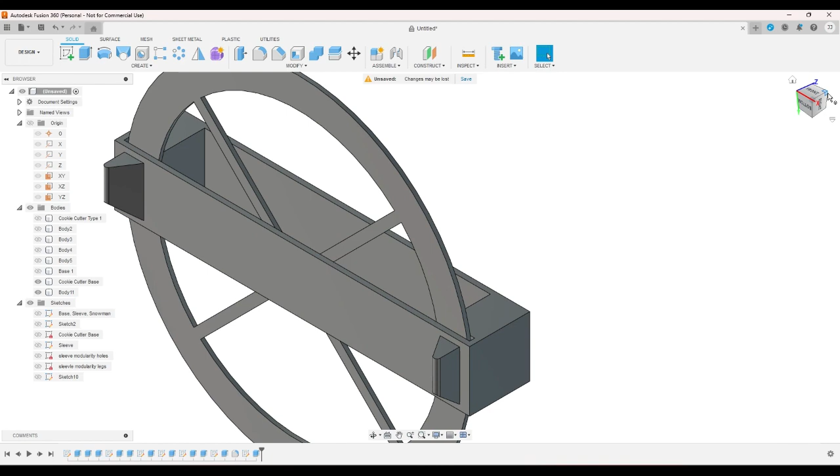And then another thing I'm going to do - I'm actually going to do this, I want to see something. Okay, so what this is going to do is if I print it in this orientation, then I won't need supports for this. And I want to see how tight that is when I put it into here, and I want to see if it's tight.

I might need to suppress this and change that, which is why I'm doing this.

Actually, you know what else I can do? I can split this along this plane. The reason being, I don't need anything other than one leg. So I'm going to go ahead and take this body here, call that modularity test, and I'm going to save this.

Going to make a new folder. I'm going to name that modular cookie cutters. And I just realized another thing - I don't need the cookie cutters to all be the same size now that I'm using this stacked sleeve system. I can make them all different sizes so long as they're smaller than the sleeve.

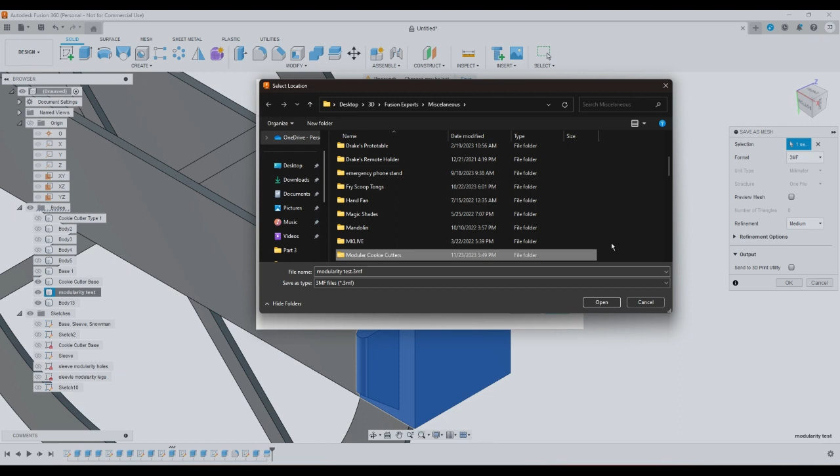But whatever. Okay, gonna make a new folder, gonna name this sleeve testing, and save. Okay, cool. And then I'll print that out and see how well this works. And hopefully it works well - shouldn't be anything wrong with this.

Yeah. Then, yeah, no islands ever anywhere. Okay.

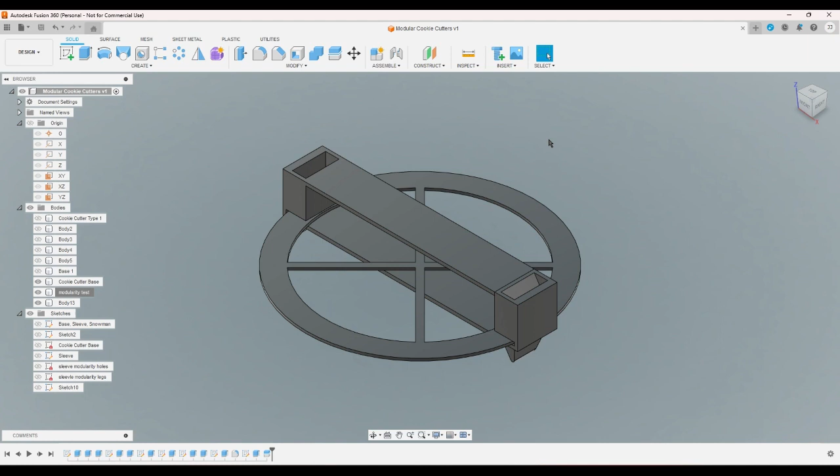So I'm gonna save this here. Put this in miscellaneous, name this modular cookie cutters. And I will see how this works. It only needs to work well enough to hold a stack of them together with minimal jiggle - it doesn't really need to keep things from falling apart when I flip it upside down. So I'll see how well this works, and hopefully it'll work well enough for me to continue on in this path.

Alright, I've got 2 copies of the little test piece here for the connection of the 2 cookie cutter sleeves, and it is way looser than I want it to be. So I'm gonna have to change that. I don't know what I was thinking with this angle here - I should just make that a straight flat piece.